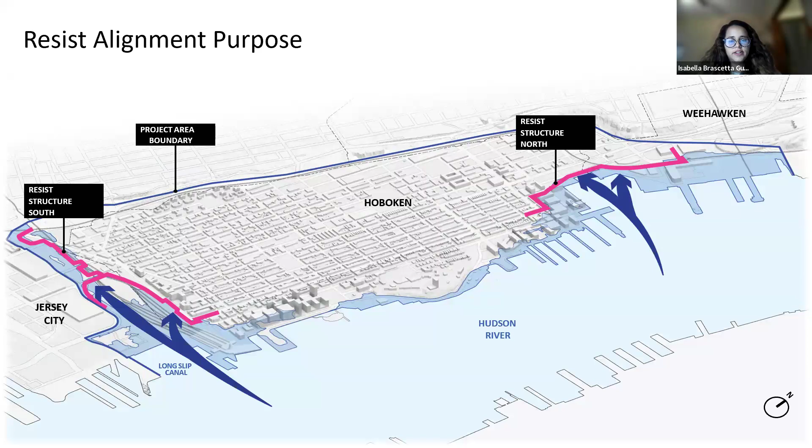Thanks, Isabella. Tonight I'm going to give a general update on the progress of the project and where we're going to be heading next. First, I'm going to give an overview of how the construction is going to proceed. Then I'm going to focus on the southern right-of-way on Washington Street, followed by, in the north, the right-of-way on Garden Street and the alleyway. And then I'll conclude with quality of life items.

The following is a typical construction sequence as the project progresses. Some of the early construction activities will include installing piles and sheeting. The left photo illustrates the piles and sheeting that have already been installed in Harborside Park. Once the piles and sheeting are installed, the contractor will excavate and install the foundation for the structure. The next photo illustrates the rebar, which will be subsequently filled with concrete. And then the wall stem will be installed as shown in the middle.

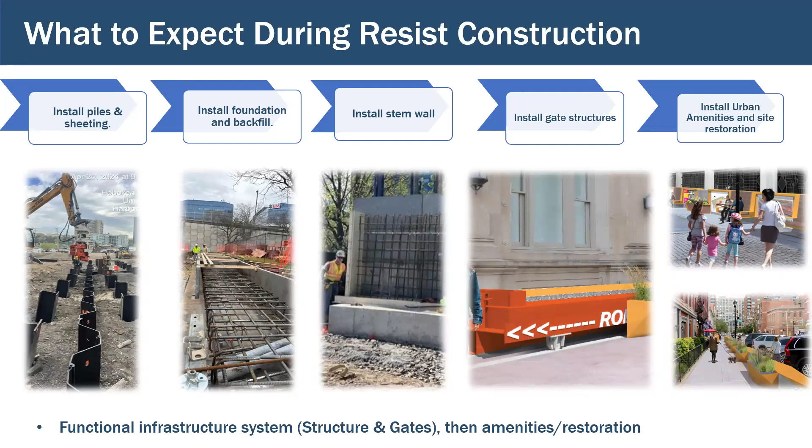After the structure is constructed, the gate structures will be delivered and installed. An example illustration is shown towards the right of the slide. The final steps will be to install the urban amenities and plantings. So now I'm going to move into the south.

So in the south, the contractor is going to be mobilizing for the resist structure on Washington Street between Newark and Observer on or around July 8th. This work is anticipated to occur in the summer and into the fall, on the eastern side of Washington Street. Continual access to residents and businesses will be maintained, and any temporary access adjustments will be coordinated in advance of the work.

Also, to accommodate some of the displaced users of the loading zone on Washington Street between Observer Highway and Newark Street, the Hoboken Department of Transportation and Parking will temporarily extend the hours of the loading zone on the east side of Washington Street between Newark Street and First Street. The new loading zone hours will be Monday to Friday, 6 a.m. to 7 p.m.

Now I'm going to move into the north. So starting next week, work with the resist structure will be commencing on Garden Street. This work will be occurring this summer and into the fall. And like I mentioned, just on in the south, continual access to residences and businesses will be maintained, and any temporary adjustments needed will be coordinated in advance of the work.

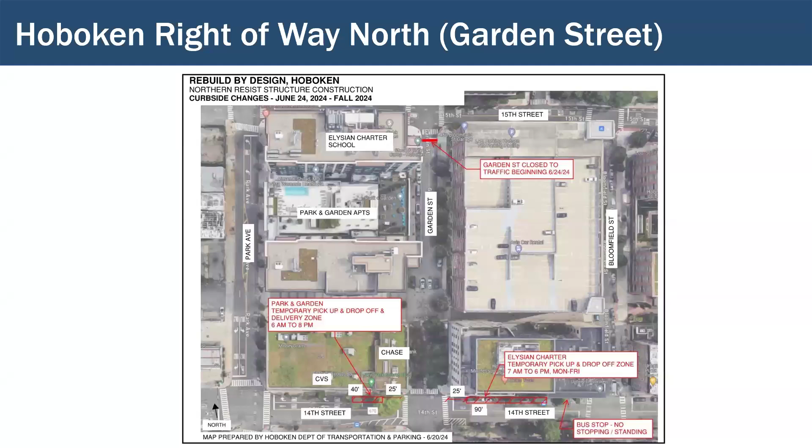After moving along Garden Street, work will commence in the alleyway between Garden and Washington Street. This work will continue in a linear progression, as I highlighted earlier. I would like to note that the alleyway will be closed while work is occurring in this area.

Did I lose you? If somebody could pipe in, I don't know if I got cut off. No, you're good. Good, apologize.

Potential technical difficulty here. So, quality of life impacts will be monitored. The construction work will be performed within the permissible noise and vibration levels, and it will be consistently monitored. The contractor will also be implementing their submitted, approved plans for noise, dust, and vibration. In the event noise, vibration, or dust levels exceed acceptable limits, the contractor will advise the construction manager and appropriate actions will be taken.

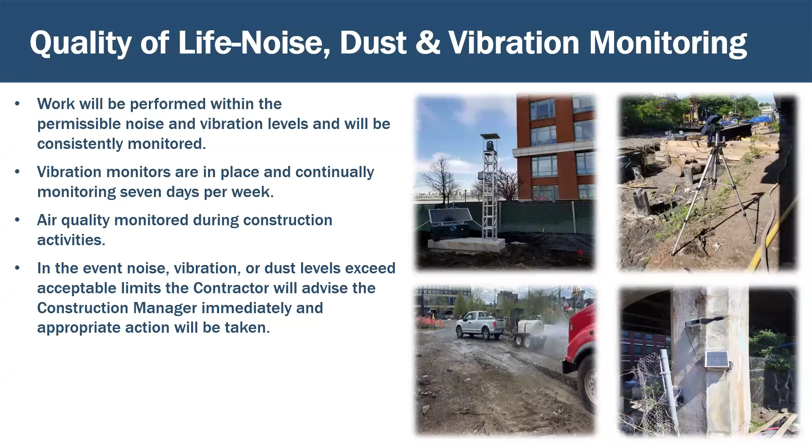Traffic and maintenance protection will be ongoing throughout the project. Periodic lane shifts or lane closures will be in close coordination with Hoboken Police Department. In addition, the Hoboken Police Department Office of Emergency Management will assist with traffic flow for any lane closures and provide traffic control officers to guide pedestrians. Also, access to the Hoboken terminal and PATH will be maintained, and coordination will occur with New Jersey Transit.

Also, no parking signs will be posted, and no lane closures or New Jersey Transit bus detours are expected at this time.

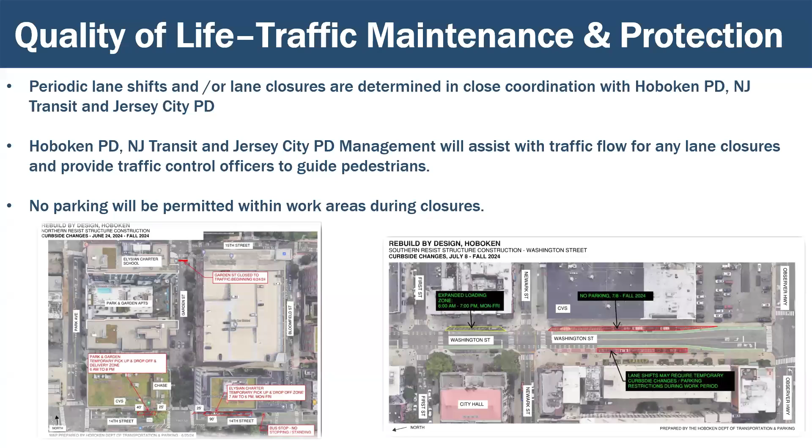And then as we wrap up, I'd like to note that there'll be another update on this project, currently anticipated sometime early 2025.